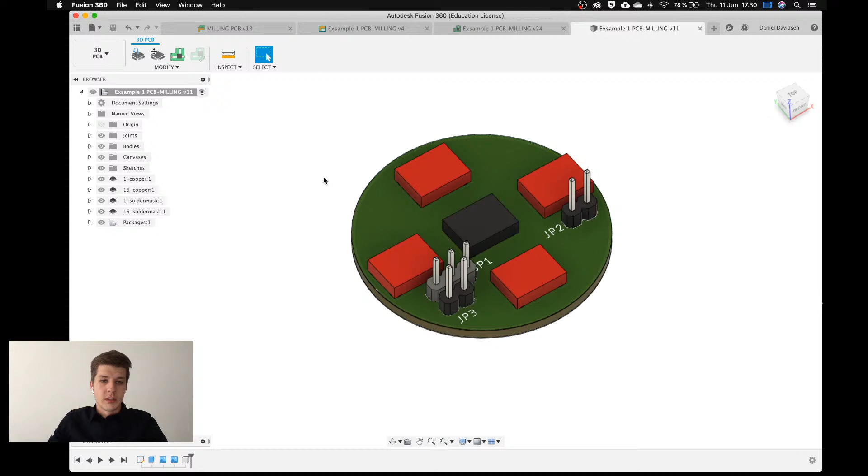So this is the small PCB that we're going to do today. It's one of my previous projects. It's a little old now, but I'll go over this and we'll figure out how to do a single-sided PCB like this one.

So just to tell you a little bit about what it is, it's basically just 5 switches. It has these resistors on it, like a voltage divider, and when you short one of the switches, it'll be a specific voltage level, and that can be sensed by this AT-tiny on the ADC converter. And then we have some pin headers for power.

We also have, so actually this is the power connector, and then we have power to a small, actually I don't remember what this connector is for. Oh yeah, no, it's for a NeoPixel ring that I used. So it has a data out here and power for it. And the last thing that we have down here is a small vibrating motor, so again a small pinout for that and a small little transistor down here for driving it.

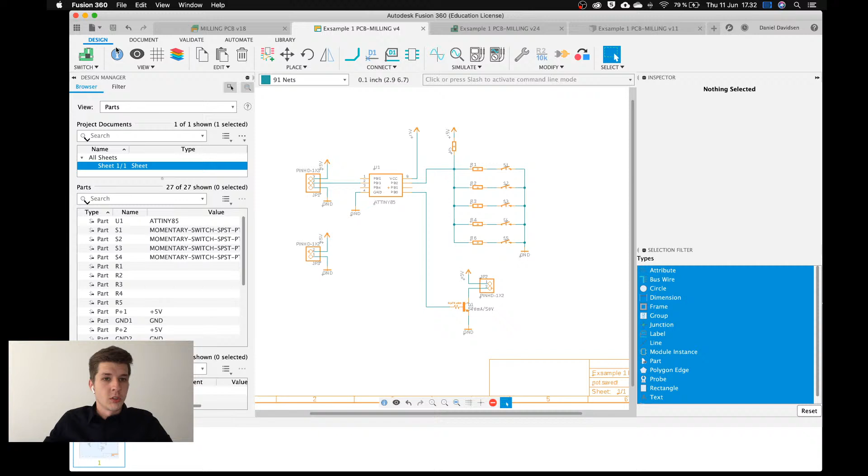So I just built this all in Fusion here, and then I switched to the PCB document and did all my traces and everything. I made sure that everything was on the bottom layer. You can do both top and bottom. If you want to do it on your CNC, you can just flip it if you want to, but it's a little bit more complicated and needs a little bit more alignment. But it's totally perfect to do in Fusion as well.

But you can only do like 2 sides otherwise. If you want to do 4-layer boards, you have to get them ordered from China. That's cheap, but if we want to prototype or make our prototypes a bit better quality, I think that PCB milling is the way to go. It's a really important way of working. So let's just jump right in.

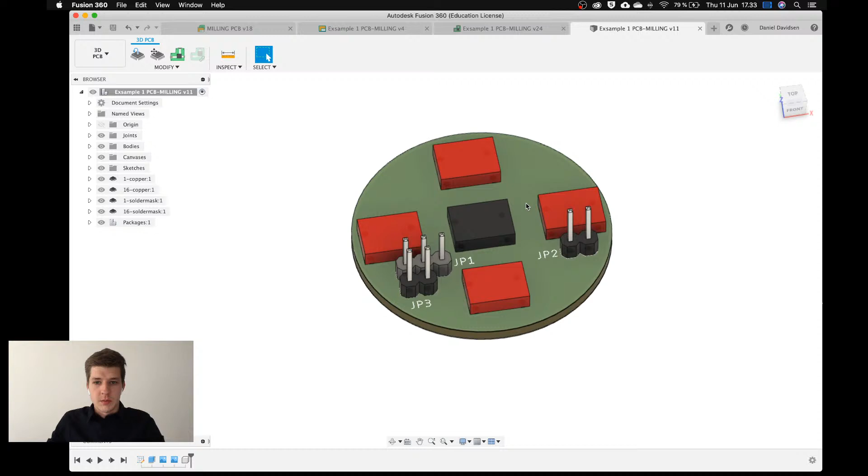So I exported it over, I can just show you how I do that. So I make sure to export over to a 3D design PCB. If I click on this button here, then it'll jump over to the design. So here it is. The switches are not really in a 3D package yet, so Fusion just models them like this.

I can just see a little bit on my screen that it might blink out sometimes. I don't know if you guys see the same thing. Please let me know in the comments if I need to fix something like that. So I am on my computer alone today, but I do have the chat open next to me here, so if you see me looking over, that's the reason why I'm checking if something is happening.

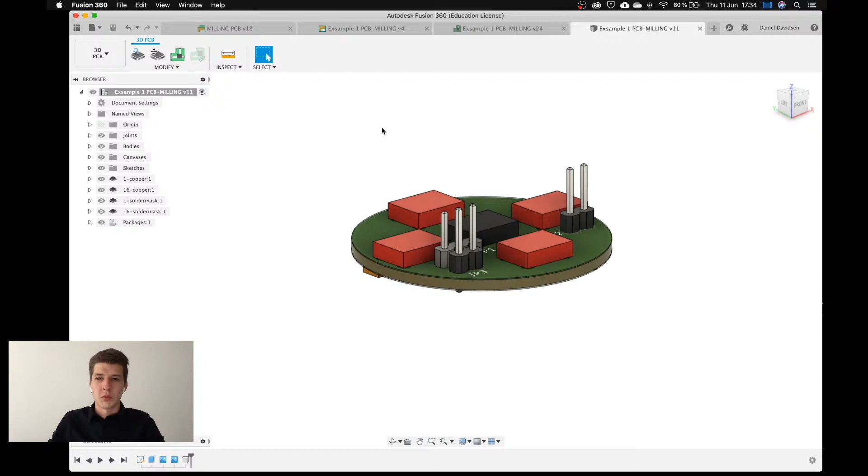So here on the bottom layer, we have all the tracks, and something really important when you want to PCB mill is the clearance between the ground plane and the traces. So the spacing in between the track and the ground plane has to match the width of the end mill that you're using. We usually use these kind of pointy engraving bits, and they have a flat area of about 0.2 or 0.1 millimeter flat. That's really good for these kind of SMD components if you want to get in there and make sure it cuts out these thermal pad connections for grounding.

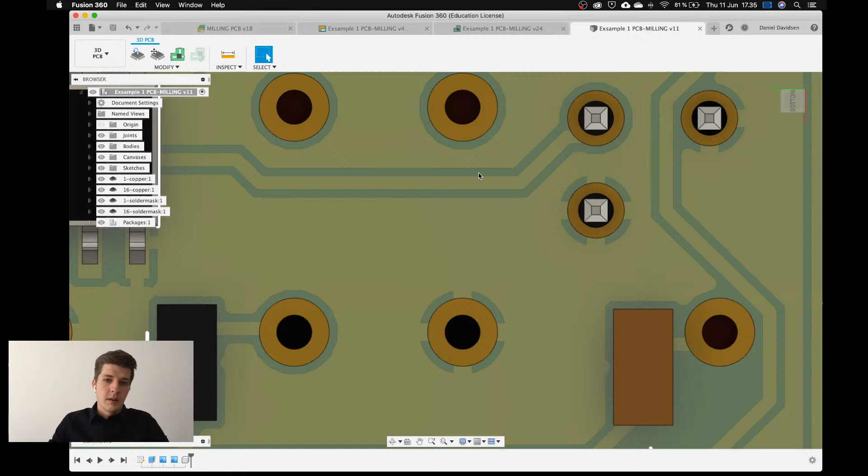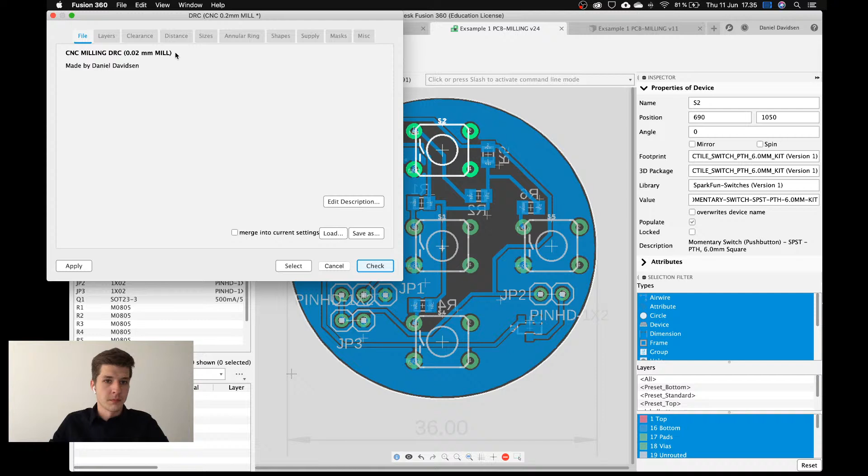The clearance actually comes from the 2D workspace, so if we want to change that, we have to change it in DRC. It's a little bit of going back and forward in your design between 3D and 2D. So the place you'd make sure something like this fits is under Rules, DRC, click on DRC.

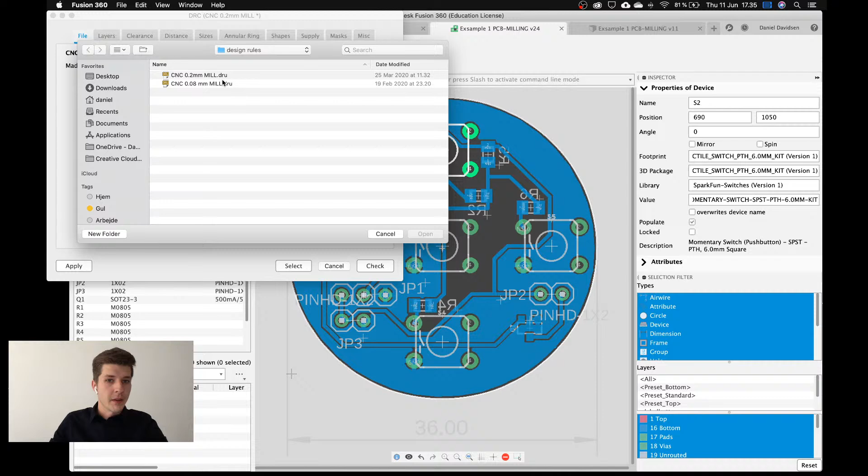I've put my clearances in here, and sometimes they come in mils. I don't have a default rule check, but under clearance it usually comes in mils, though you can switch between mil and millimeters and it will just convert it. So I'm going to use 0.21 millimeters to give a little bit of space, since I'm using an engraving bit with a 0.2 millimeter flat on the end.

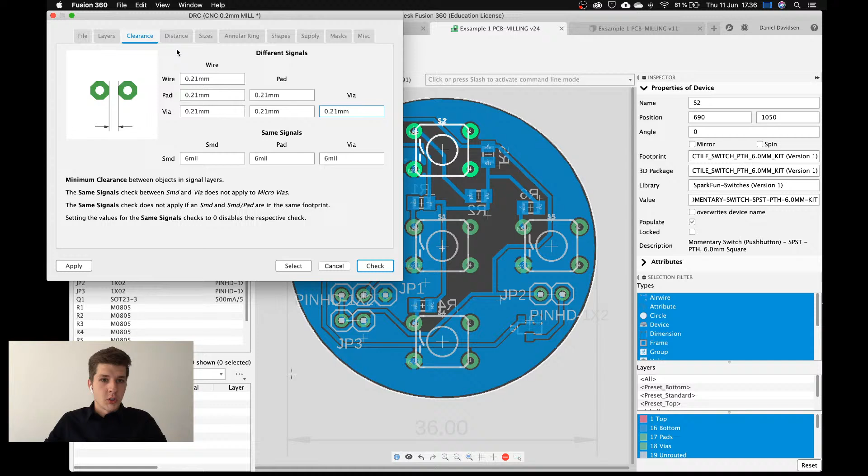So just type all that into these fields here. The drawing on the left side is quite self-explanatory, so just make sure those are selected. I do the same thing for the edge of the board and the traces, and under supply, if you want thermal isolation, you should type it in here as well.

Since we're in the DRC, I'm going to go over the layers as well. The layers define how thick the copper layer on the top and bottom is, and the whole thickness of the board.

I'm going to change this because I already cut this on a CNC and figured out I need to go a little bit deeper for the copper layers. So I'm changing this to 0.2, and my total board thickness is usually 1.6, so I'm subtracting here to get the correct thickness. That also sets how deep your engraving bit is going to go.

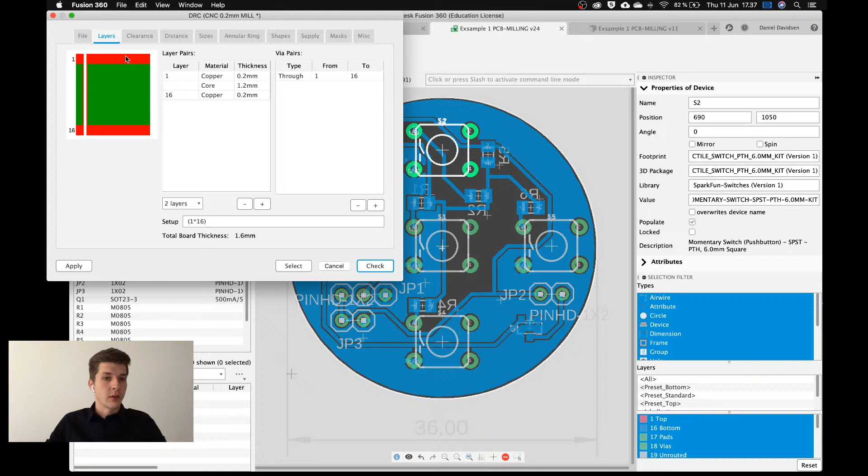So when all that is done, I'm going to apply and select, and that changed all of that. Now I'm just going to push that over to 3D design as well. You can see in the bottom right it has to recompute the whole model, so it takes a second.

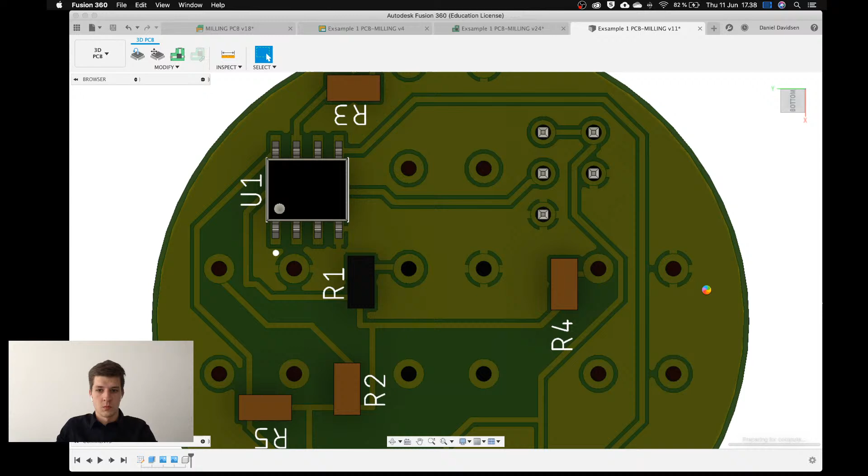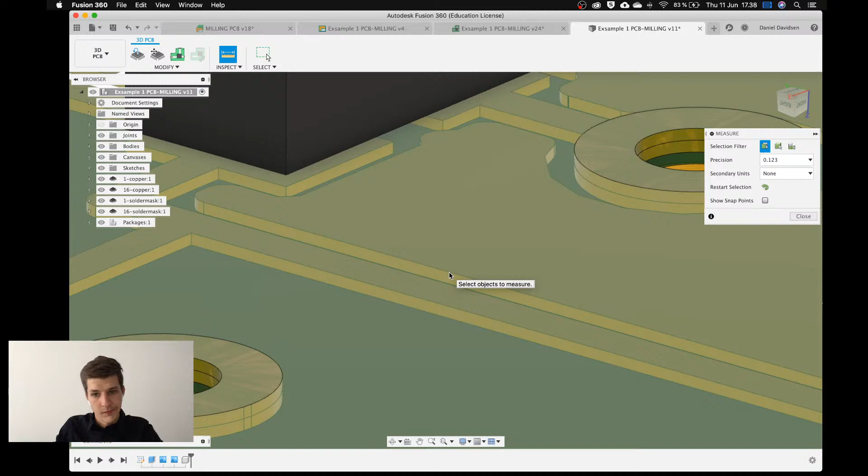Now that I have everything done, I can check that my clearances are correct. If I zoom in and press I for inspect, or measure, I can click on one of these lines. A quick tip, if you hover and hold, you get the selection bar so you can select better. You see it is indeed 0.21 millimeters, just like we wanted.

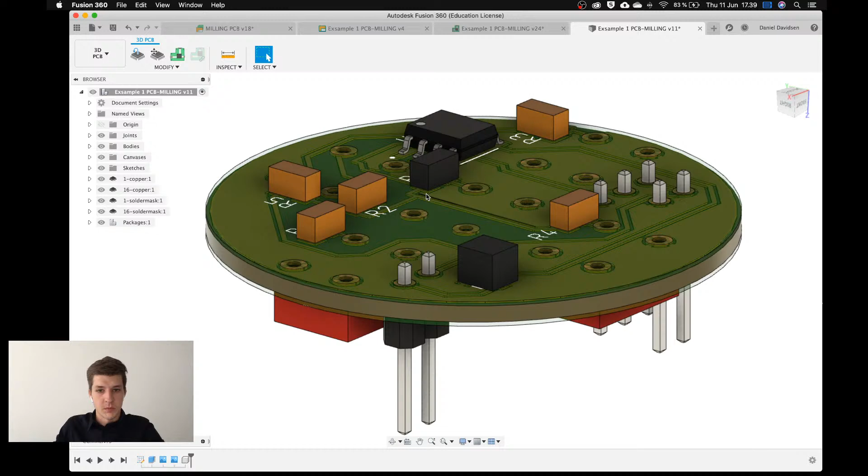Okay, let's get ready for milling then. The first thing I want to do is clean it up—I don't want all of these parts showing on my design when I'm looking at it. So I'm going to turn off the packages, which turns off all the components. Then I have layer number one, the top copper layer down here, which I can turn off since I'm not doing this as a two-sided design.

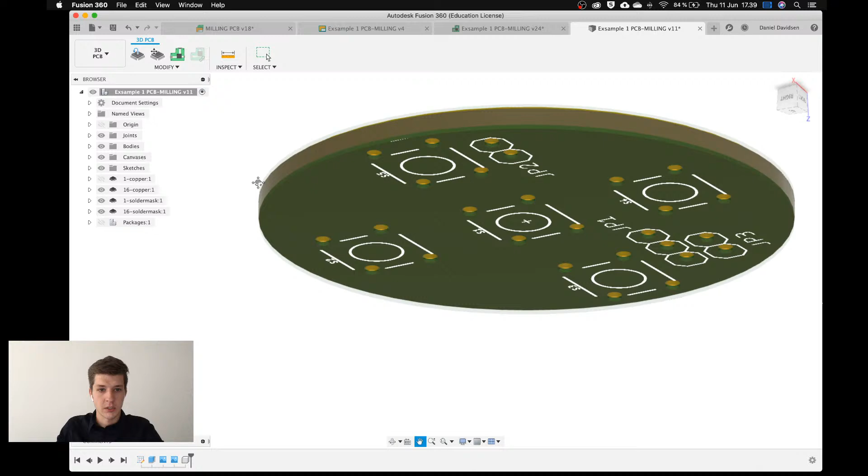The next thing I want to turn off can also be layer one here. Layer 16 is the bottom one, and the solder mask—turn that off as well. So you see now that it actually shows the bodies.

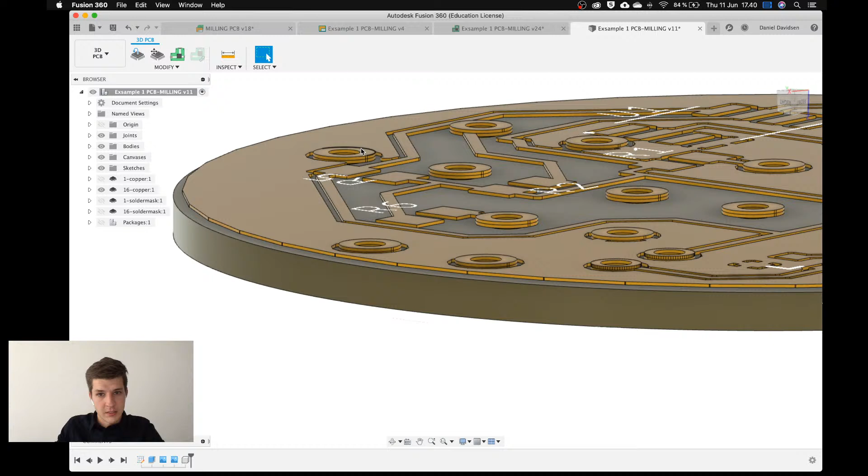Down here I have the board, and then I have my track with the copper layer, and all the way on top here I also have a silk screen, I think it is. So if I click on one of them and press V, it hides it—so it's inside of this component right here, and one of the bodies is now hidden.

So I want it to look like this: one single height with the copper layers that I need to cut out. Then I'm going to use the drop down over here and go into manufacture.

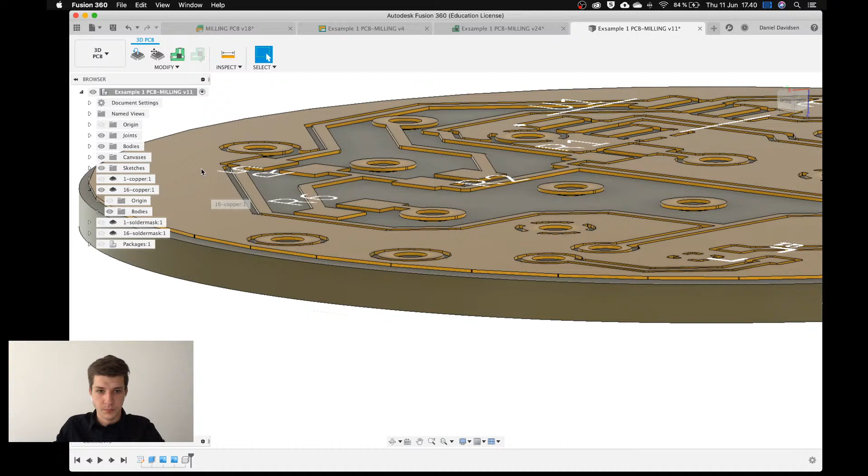So my setup here is already done because I did it once. I'm going to show you how to do it, but let's first have a look at what we're going to end up with. I get these warnings for out of date because I updated the DRC, so I can just hit setup and do Command G for regenerate.

And that's going to regenerate all the tool passes here. It is a 3D toolpath, so it's going to look at the model and calculate the correct route. That also means it takes a bit more computing power to load, so this might take a while, like a minute or so, especially when my computer is under heavy load from streaming this live.

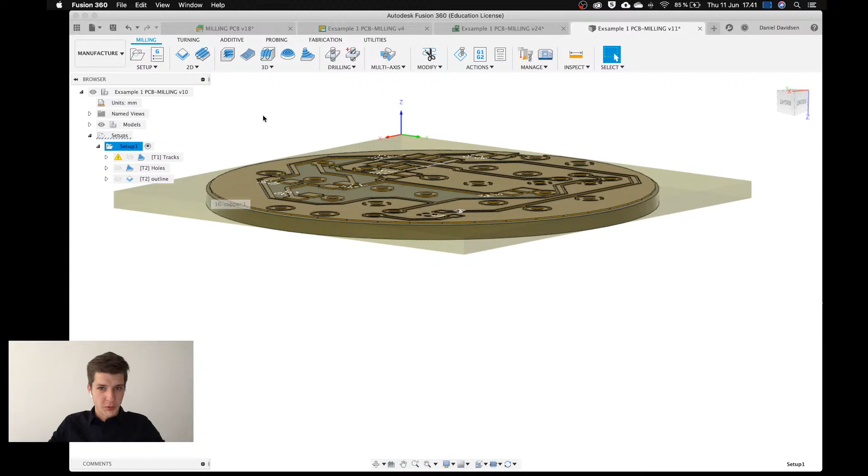There we go. So if I just do a quick simulation of this so we can see what's going on, I click on simulate up here. I'm going to turn on stock and turn off the model. This basically represents the copper sheet that you're going to put inside your machine. And I'm also not going to show the holder just because that's quite big.

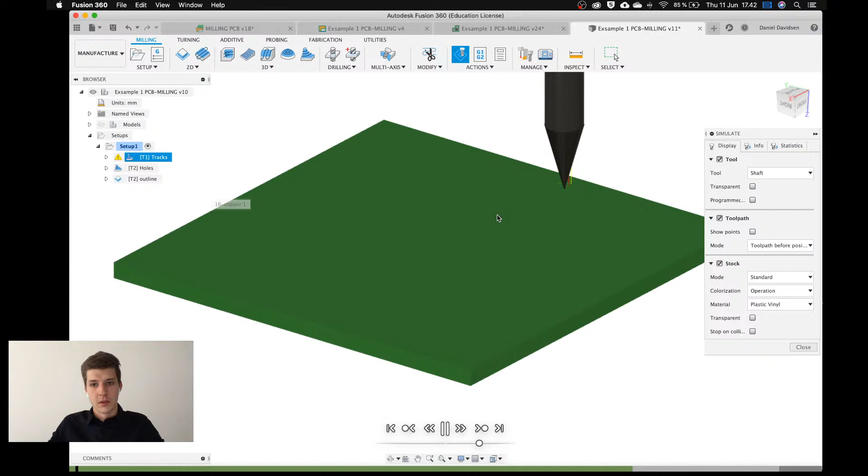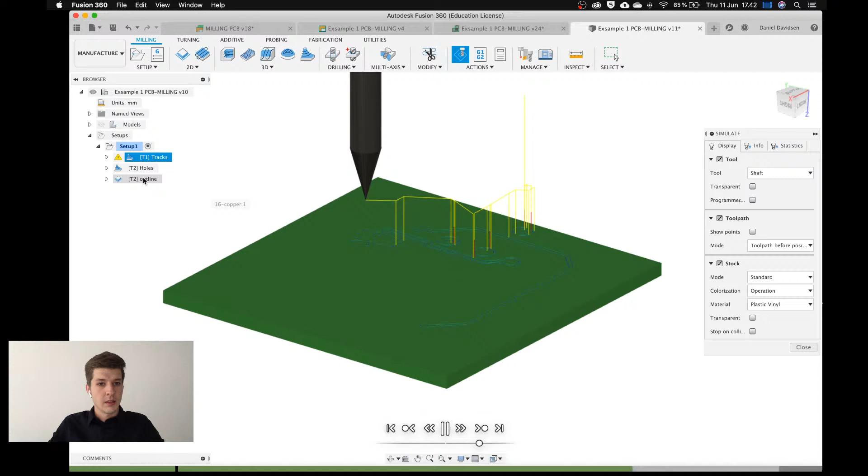So it will start out doing all the traces on just the top layer with the engraving bit. When it's done with that, we have to change the tool to a flat end mill, and I'm going to use a 0.8 millimeter end mill for the job. That's what it's going to do next. The next operation is going to be drilling out all the holes, and the last operation is going to cut out the outline of the board so I actually have a board.

So I can speed this up so it goes a little quicker. You can see that it goes through and does the whole job.

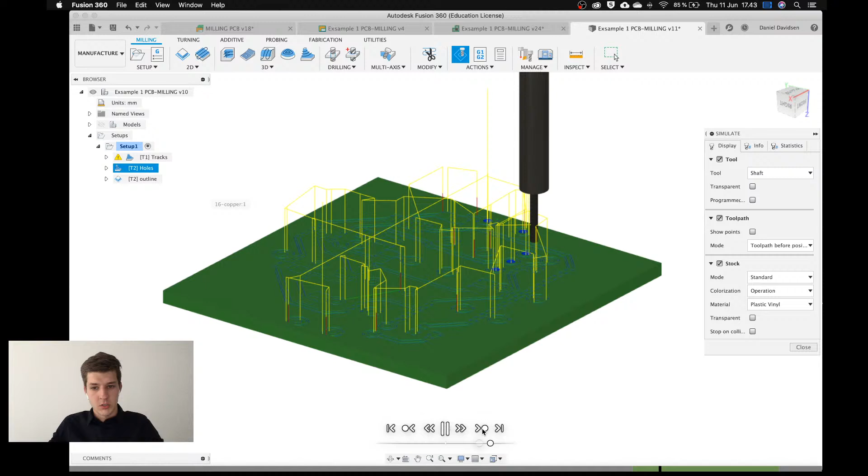And right here, you can see that it's going to change operation into the end mill. It's going to go in and cut out all the holes. I'm just going to skip ahead so it goes a little quicker. And the last thing you'll see it do is walk around the perimeter and do this in a single cut.

Okay, so how did I do it? Let's do a new setup. Turn on the model, new setup, click on this button right here.

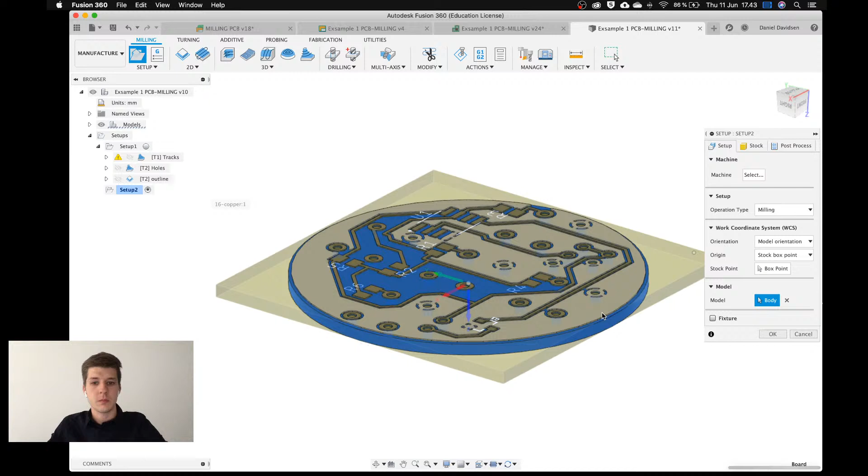Okay, first thing is to select your model. Under model here, if it's already pre-selected something, make sure to hit the cross and make sure that it doesn't have anything selected, because otherwise it might have packages included in the models and we don't want that. So we're going to hit on the bottom layer here, and then I'm going to grab all the masks, and it should be like 3 clicks or so, just so I have everything selected now.

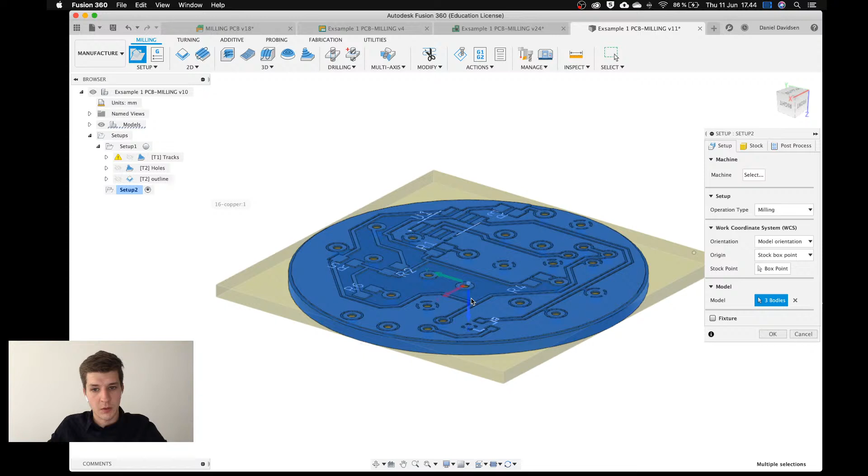Next thing is to orientate the coordinate system to the correct point and set the starting position. So first of all, I'm going to orientate it so it's right. I have Z downwards right now. I can simply flip that by hitting the small arrow here. If I click on that, I'll flip it. And this orientation is actually already correct.

But let's say it's not, just so I show you how to do it correctly all the time. Let's say that Z was pointing in the wrong direction, so it's like here, Z is in the wrong direction. So I have to make sure that that's corrected.

So under orientation, it pre-selects model orientation. You can choose another one, like Z and X axes - that's what I'm going to choose. I'm going to choose the Z axis. Here I can choose either an edge that is parallel to the z-axis, or a face that is normal to it. I'm just going to choose the top face here.

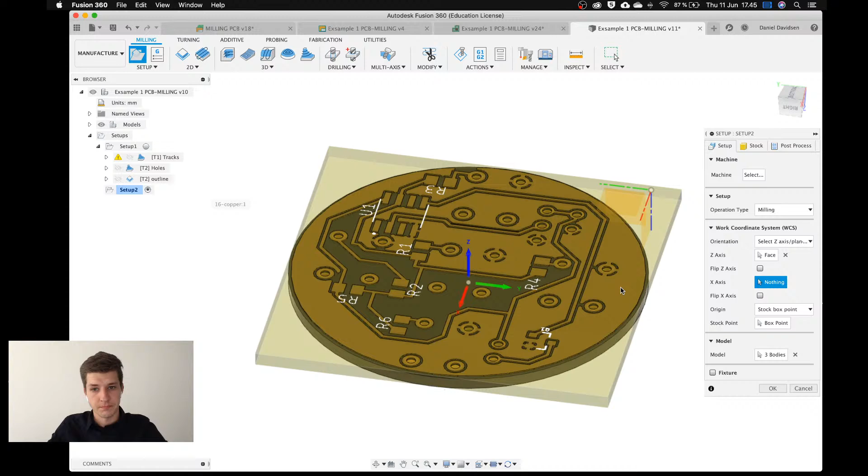So you see now I flipped it down. I can do flip z-axis - that's the same thing as hitting the arrow. And then I want to make sure that my x-axis doesn't really matter, it's round, so I can just choose maybe to be parallel to this axis. And you can see that it switched.

And then I want my starting position to be here on top, so I can do stock point. It's going to give me points on the stock all the way around, so I can choose the middle or somewhere else, but I'm going to choose this corner up here.

It's rather important that you choose the top point if that's what you're going to do. Often we go in and touch off on the surface, so make sure that you set your C0, your coordinate system 0 point there.

Next thing is stock. I am going to choose relative sized stock, so the relative size box, and then I'm going to choose the offset mode to be no additional stock. It tells me the height is 1.4 millimeters, and that's the size I need for the job. It's 1.4 because we deselected the copper on the bottom. I said PCBs are 1.6, but we also put copper on the bottom, being the last 0.2 millimeters, so this is fine. We're going to go through with like 0.5 mil anyway, so I'm just going to hit OK, and that's the setup done.

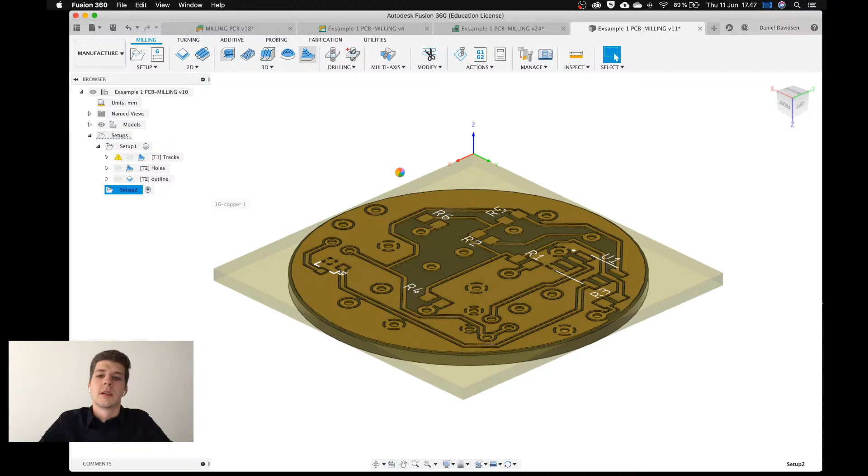We'll just give it some loading time.

Here we go. First thing should be to select the tool, so under tools here, we should select the tool. I already did this, so I have the tools built in, I have them right here. But I'm just going to show you how to do a tool like this.

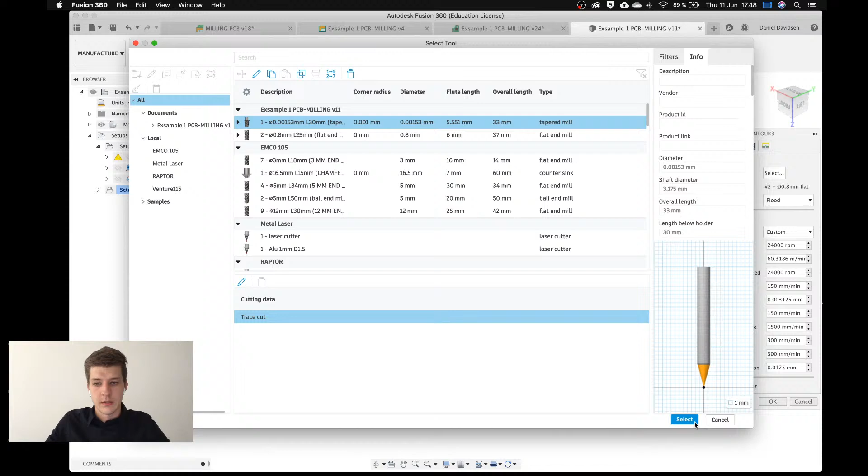So what can I do? Now I can't create a tool before, inside the selection, so I'm going to choose my tool first of all, and click select. I'll show you how to create the tools after I've done the contours, after I've done this toolpath here.

In case you want to know, these are my parameters. Maybe this should also be 24,000 RPM. The cut feed rate that I like to use, this one here, is probably the one people are looking for - 150 millimeters a minute is what I'm using. I've also seen that Fusion right now has some problems with really small millimeter values. I'm not going to deal with that, I think it's some kind of bug in Fusion, so that's just how it is for now.

Next thing is contours - geometry, and then I can do selection, and select the outside of the board. That tells Fusion you can work on anything that is inside this green profile. Then I don't want it to cut out this small part right here, so I'm just going to do an additional offset for the sides, and I'm going to choose that to be -0.5, I think that's going to be okay. We can always check and go back to see if it creates any problems.

Then I'm just going to go over heights. I don't think I have to change anything here. Step down is also fine, 1 millimeter. Linking - here I want to change this to be plunge, and I don't want it to have lead ins and lead outs. I'm just going to leave it like those.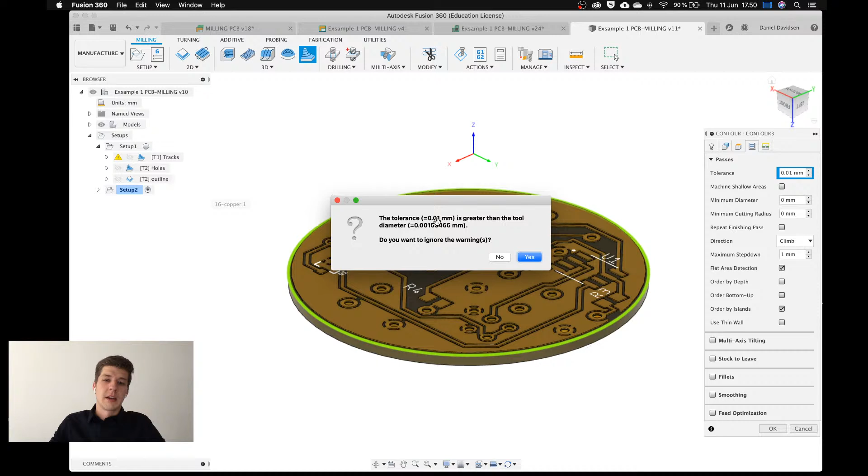So let's hit OK. It just tells me that the tolerance is greater than my tool diameter that I told it to be - we're going to hit OK for now. This was not a problem a few months ago when I did this, but when I try to do a 0.2 millimeter tool now, Fusion rounds it down to almost 0. I hope they'll fix that soon.

So, calculating the toolpath. I know it's going to make one mistake here, and I can tell you a bit about it while we're loading the toolpath - it's because of the holes. It's going to try with the tool to drill out the holes. We don't want it to do that, we don't need it to drill out every single one of these holes as deep as it can go. We're going to come in with another tool later on, and that's going to drill it out. But just for showing what it actually is going to do, we should just do it like this.

Okay, I think I've gotten there. So just open the setup. I usually don't find my computer slow, but if you're doing a live stream, that's heavier than you think.

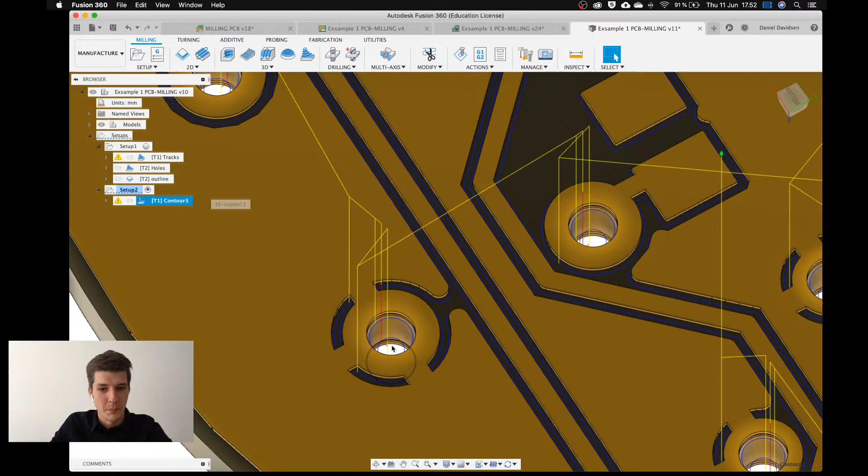I found out. So you see here, the blue part is the bottom of the toolpath. It's trying to drill out this hole here. We don't want it to do that. So my fix for it

is that you can just set the height to be different. So I'm just going to edit the toolpath, and we're going to set the bottom height to be equal to like the lower layer in here. So... any minute now.

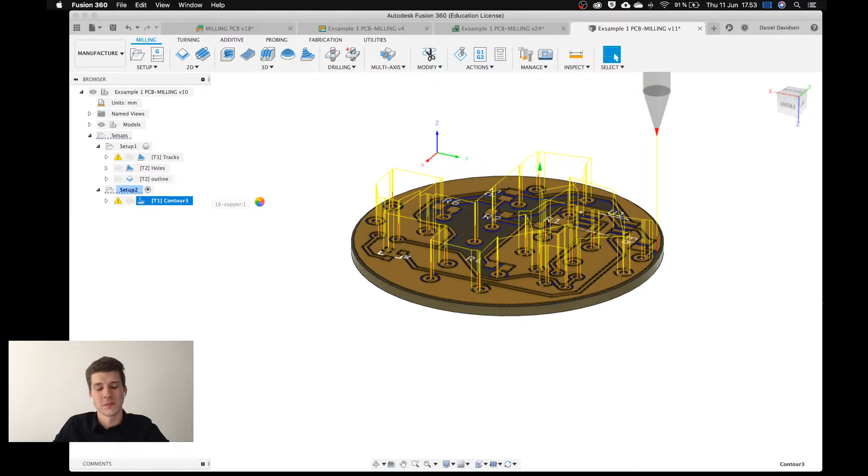There we go. So under height, I can do bottom height, and then I can do selection. And I can choose this face right here. So even if I go back into the PCB working space here, it's going to obey that this is the lower part that you can go.

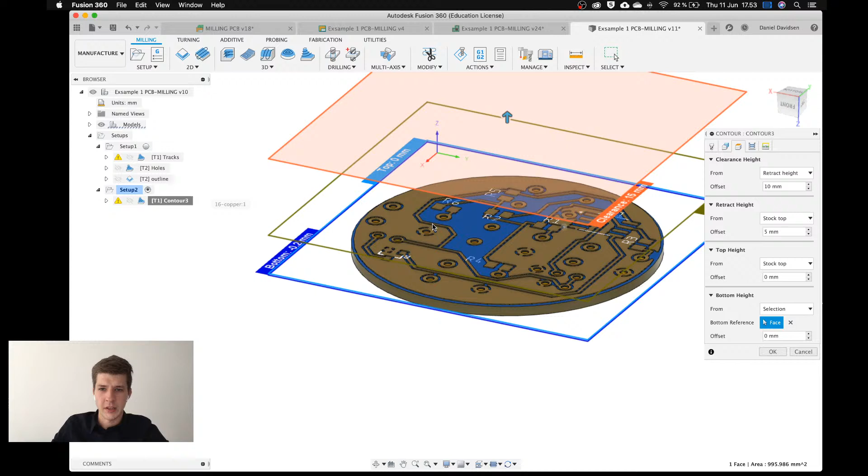You also have the opportunity to do an additional offset if you figure out that you have to go deeper. It's a matter of preference if you want to change it in DRC, push it over and then fix it. And then you fixed it for good, or you can do the cheat hacky way and just do offset.

So if I do OK now, it's still going to give me the same warning. That's fine. So now it is still going to engrave the center of all of this. It's maybe not the best strategy to do, but I think it's so quick for the machine to do that, that I'm not gonna bother with fixing it.

Otherwise, you have to select all the holes, and when you select like the green circle here, you can select all the holes, and that will tell Fusion to stay out of those areas. So if you have an enclosed area inside another enclosed area, it assumes that's a no-go zone, and it will not try to do anything in that area. But I wouldn't do something like that.

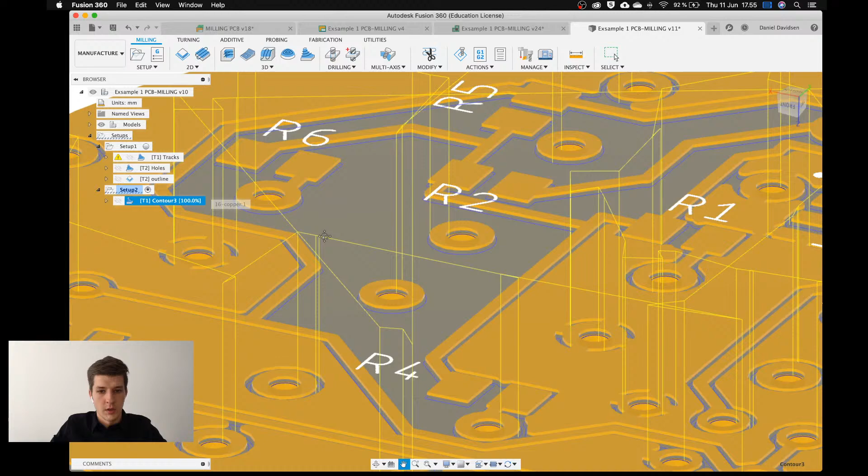I'll just let the machine run a little bit longer. Okay, so finished calculating. There we go. And if we look inside one of the holes, you see that it doesn't have the cutout anymore.

Okay, so quickly, the tool — if I want to create a new tool, I can click on the tool library up here. That will allow me to create a new tool. So I'm just going to load, and here we go.

So select the library, it says. Let's just choose this document and then click add new tool. So here you can choose either between a tapered mill, that's what I'm going to do, or some people like to do that or a chamfer mill. Chamfer mills are not that great for it because I think contours are not allowed with chamfer mills.

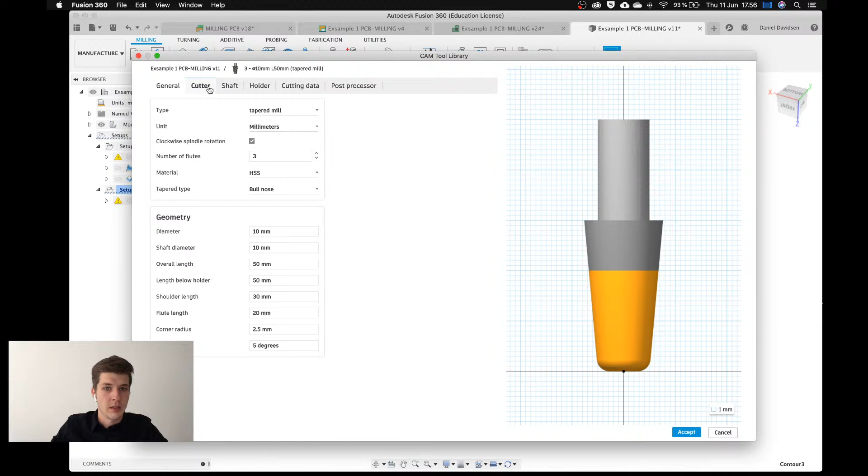So just choose tapered mills, and then you can go under the cutter. So we're gonna have a single flute, and it's going to be a bull nose, and the diameter of the bull nose down there is going to be 0.1 or 0.2 millimeters. Shaft diameter is usually around 3.

Overall length, I'm not going to touch it. Doesn't really matter for me. You have to be specific for your tool. 50 — I know it's a bit long, but I'm going to leave it. You get the hang of it.

And the last part here is maybe corner radiuses down here. I choose those to be — you should choose them to be 0. But Fusion has a problem, so I'm just going to do it point by point, like that. So I think maybe a little.

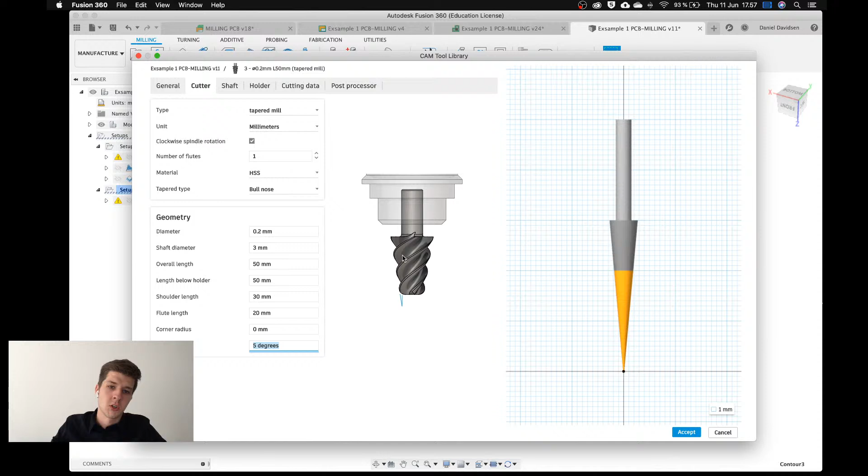I did it. And the taper angle, the one that we are usually using is 30 degrees. But just be aware with the angle here that it is measured from vertical, so it is going to be 15 degrees instead.

And I think how I fixed that it doesn't have this huge hangout like this for my tool is I did the math. You know the angle, you know how thick the tool should be in the end, figure out how long that should be. Let's just try doing something else like 10. See.

Why didn't it do that? Shoulder length must be larger than flute length. Okay, flute length, there we go. 10, 8.

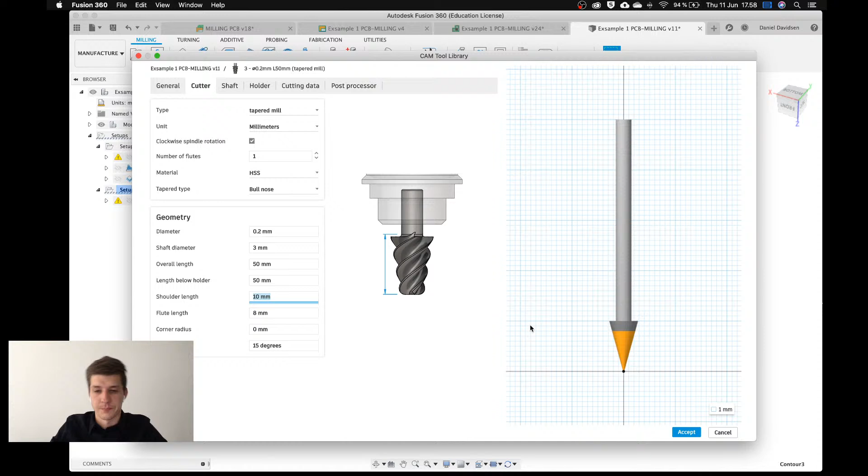So you see where I'm going with this. I highly recommend doing cutting data, so I did a cutting data here where I chose it to be like trace cut, and typed in the parameters from before. If you want to know them, scroll back in the video and you'll find it.

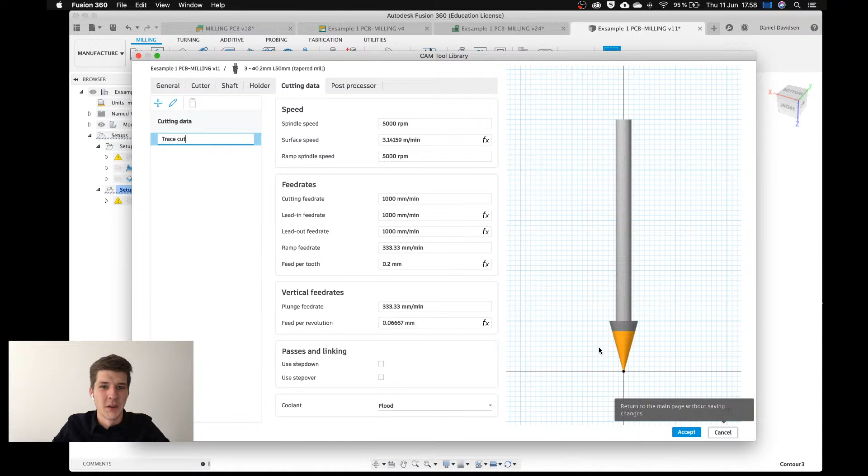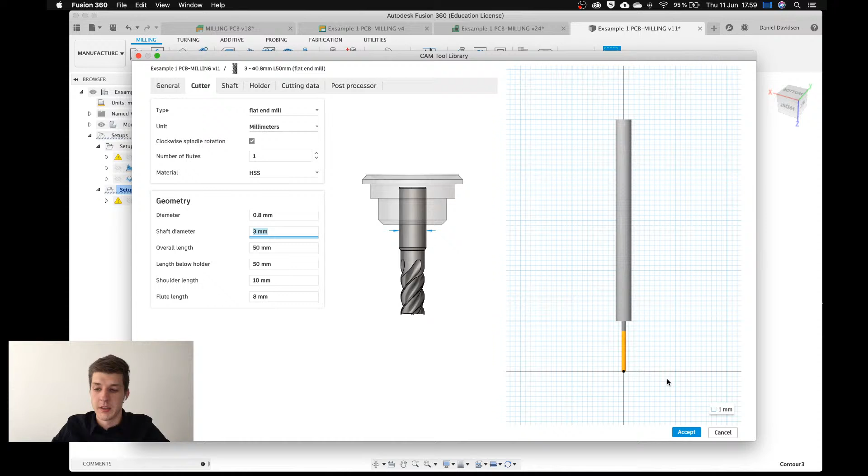And if we want to change the cutter, you can change it here. Instead of tapered, you can choose a flat end mill and go through the parameters again. Same deal for our 0.8 millimeter end mill instead for cutting out. So that's the one we're going to use now.

Okay, so that's next: holes. When we want to do the holes, I am going to do contours again.

This video is going to be mostly you looking at me waiting for something to load.

So first thing is the tool that I should change. I'm just going to choose the 0.8 millimeter tool that I have. Here we go.

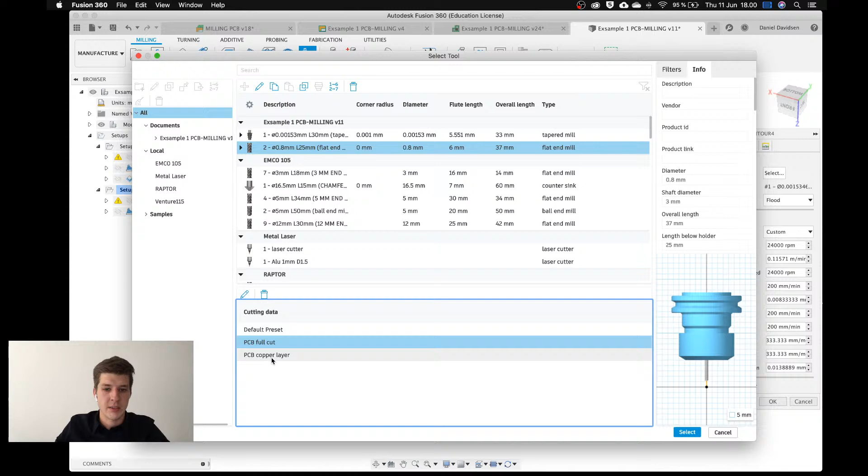Under my cutting data, I made sure I had a PCB full cut. That's the feeds and speeds for a full depth of cut with these end mills. But if you do your whole job with a 0.8 millimeter, you can run a lot faster on the copper layer, so having a faster feed rate for that is my recommendation. I'm just going to choose select.

If you're wondering what the feed rates are, here they are. Now that I see this is 200 millimeters a minute, I think you can go a lot quicker with the engraving bit, but that's on your own shoulders to do so.

Geometry, I can just click on the edge. It's going to pre-select it to be selection. It knows that's what I mean.

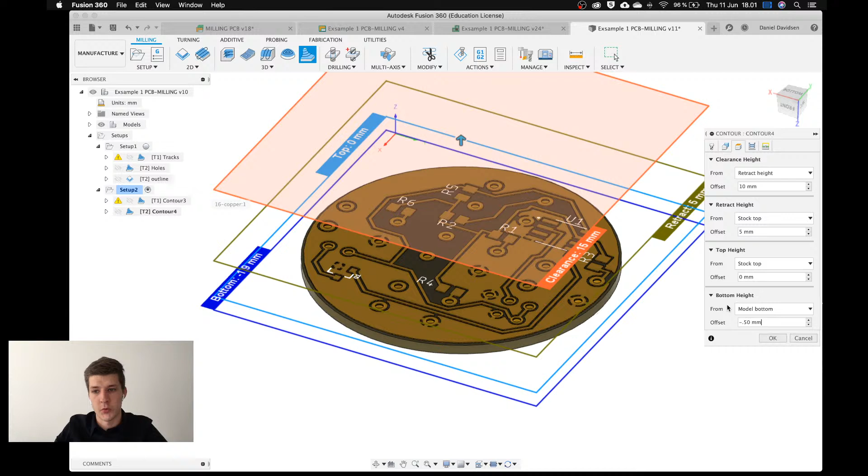Heights, bottom height: I want this to be negative 0.5 millimeters, just to make sure I drill all the way through the bottom. We usually have wood underneath this, no big deal cutting through that. So that's what I'm going to do.

And then the maximum step down. This is already a 1.4 millimeter board, or 1.6 in real life actually, and then we just added an additional 0.5 millimeters. So if I want to be exact about it, I could do 1.4 plus 0.5, and that should make sure I can go through and do this in one cut.

Linking: again, I'm going to turn off helix into a plunge, and I'm going to turn off my lead-ins and lead-outs. You will quite likely get errors if you have lead-ins and lead-outs turned on, because it's such a tiny hole where it has to go in and do a job. So just choose OK, and let's see what kind of toolpath that gives us.

As in our previous live stream, we should think about getting elevator music.

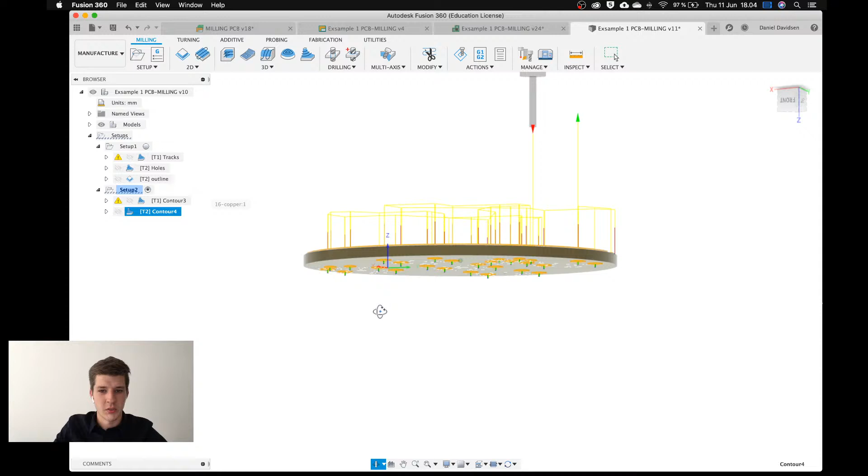So it is going to go through the holes. If I go under the bottom here, we can see that. So there's also another mistake here. You see how it helixes in and does this kind of spiral - that's the step down set to a wrong value. And it also has the problem right now of trying to cut out these things we already did with the engraving bit. So, edit, and we're going to fix that.

Fixing this is going to be almost the same procedure as we did with the bottom height for the engraving bit. We're just going to choose that it can only start doing work at the same face, being this one, so it doesn't look at the geometry that the tracks actually are at. We're just going to ignore those when we get the option to actually do it. Here we go. So top height, do selection. Selection to this reference, this plane right here.

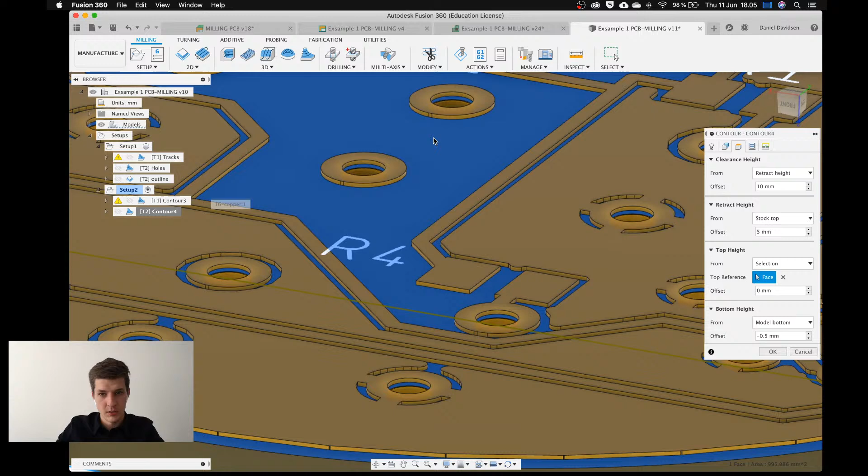And just going to set this to like 2. We'll see if that doesn't fix it. Otherwise, try like 8 or 5 or something. Then that should do it.

Sometimes if you're right on the border, it'll do a step down, where it'll go in and spiral instead, like that for clearing out chips. But we've done this 100 times before at FabLab, and you can do this in one operation, so no need to do step downs here. At least that's our experience.

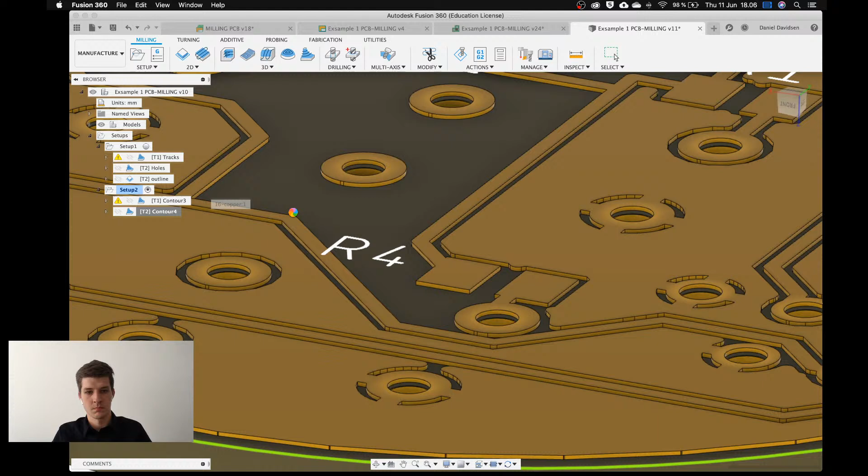Here we go. So you see a lot faster compute time for figuring out the contours there. But obviously not quite finished yet. We're thinking.

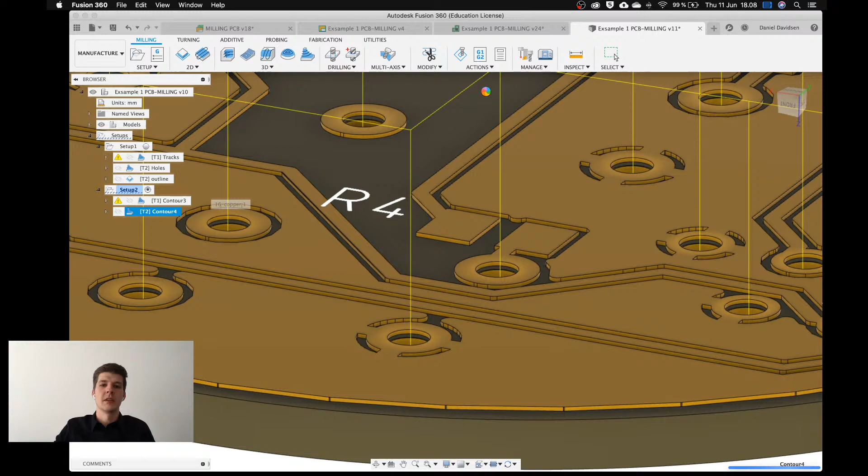Interesting. Finish the toolpath, but the computer is still loading. Might crash, does that sometimes, like the new electrical environment that they placed inside of Fusion has caused a little bit of hiccups. I usually find that it sometimes might crash going from PCB design into 3D design or do bigger computes like this. But I think really, even though there are some hiccups, it's totally worth it. Some of the new packaging and everything they've done with the design is super cool.

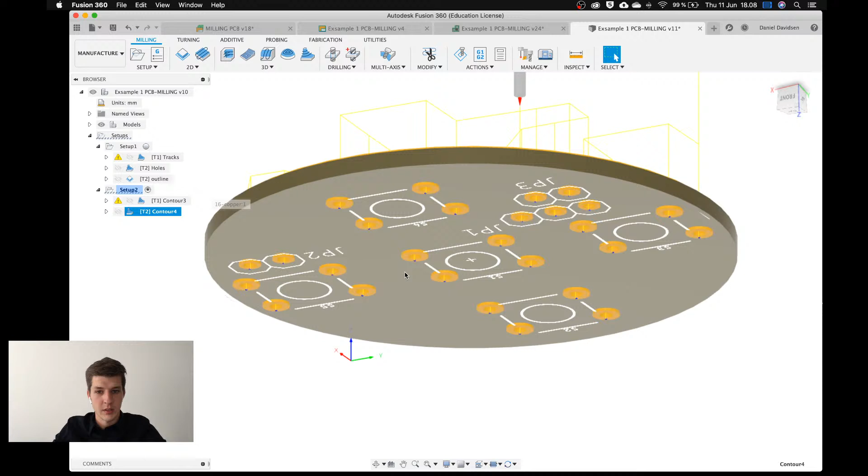So here we are. Here it calculated the way that it's going to go over and do all the holes. And if I zoom in on the bottom, what we should see is one blue line going around doing a small contour, just because the tool is smaller than the actual hole that it's going to go over and drill out. So this is quite neat.

Last step is to do the board outline, and I'm going to use 2D contours for doing this, just because I find it easiest, and it's what we call a dumb toolpath. So it's going - you have to select exactly where it should go. Before, we'd select something where it should look inside and figure out how to cut it. But with 2D geometry, I can tell it to cut anywhere, and it will just go straight through my board if I tell it to. So that's one thing to be aware of in 2D.

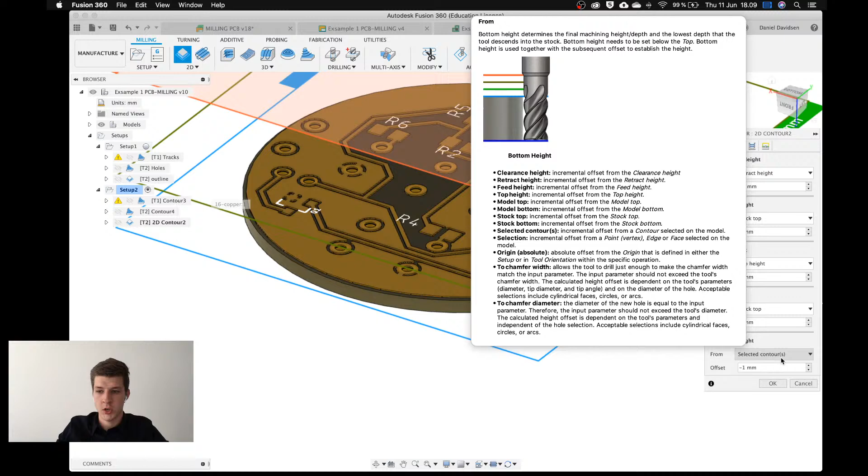So it pre-selects the previous tool used. That's also what I want - I don't want to change tools, so that's perfect. And I'm going to go under geometry. Here it's important that I select the bottom contour. The reason why it's important, you can also see that it's now a blue color, is when I go under heights, the bottom height is selected to selected contours. So if I selected the top, it wouldn't go all the way through the board.

And I've set my default to go negative 1 millimeters just because we do so much plywood work on this kind of CNC. I'm going to go with 0.5 instead. But most Fusion users will have this set to 0 as the default.

And then I'm going to make sure that multiple depths is turned on. It says 6 millimeters - it doesn't matter because our board is thinner than 6 millimeters, I'm going to turn it off. Most people don't have this turned on, it's tool library specific if it's turned on or not. I just programmed mine so that it is turned on - it's a good little safety feature.

I can have lead-ins if I want to. I don't like lead-ins actually, I don't find them very useful most of the time, so just turn them off. They do have their place - some places they are quite neat, but not for this kind of job. I don't think they're necessary.

So just do OK, and those usually load completely, like really fast, because it's just a line - you tell it to go on that line, it will go on that line. But the computer is a little slow here. This should be like a 25-minute work webinar if I had a faster computer.

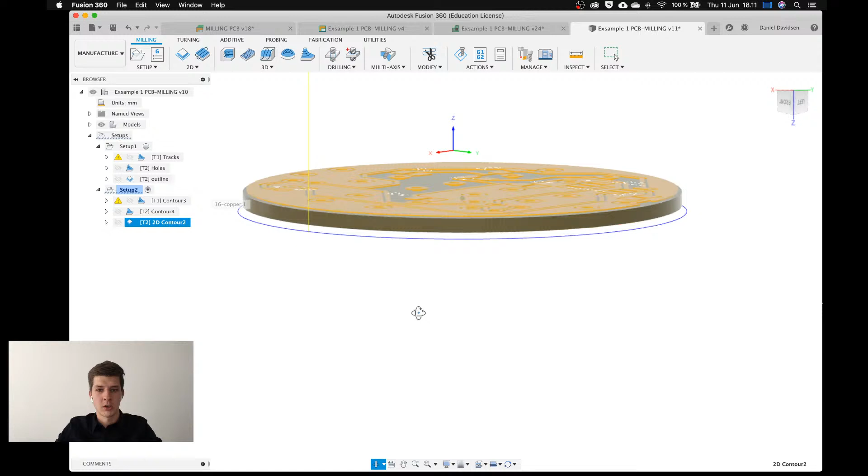There we go, just click on it. You can visualize and see that it's actually 0.5 millimeters below where I clicked. So now we are at the same level again, and we can go to simulate.

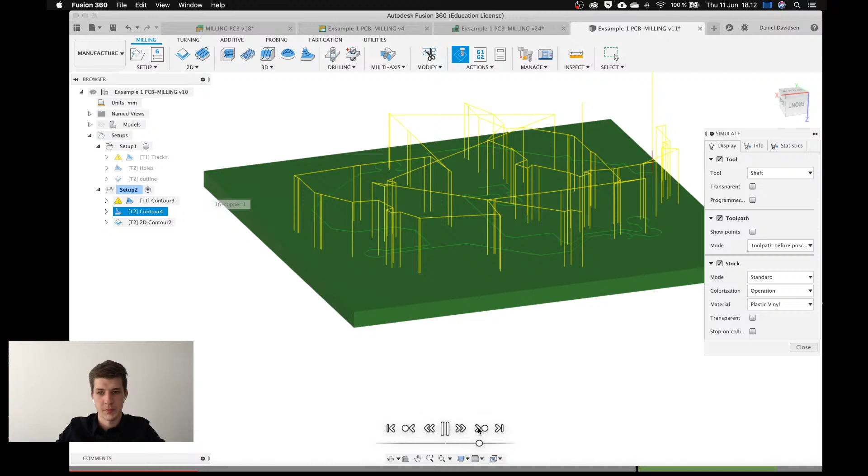You've already seen this, so just quickly, but it's a good representation of what's going on. Turning off model, and it's going to cut everything through here and do all the job. Okay, rather cool, I think.

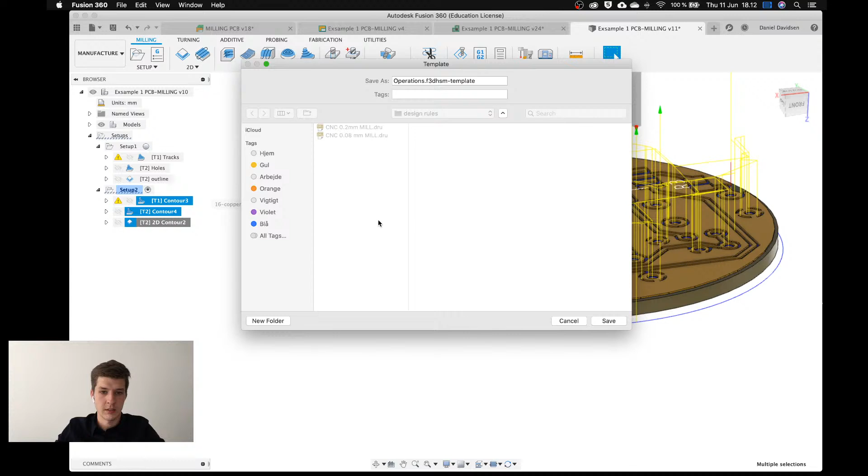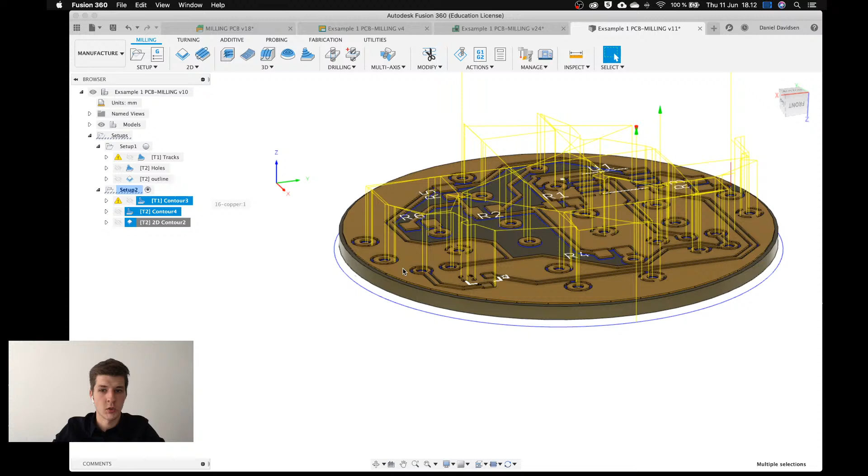So now that I've done this, maybe a cool little procedure would be to save this. Like 99% of all my PCBs are going to be programmed exactly like this, so I can save this as a template. I can click store on template, store as template, and select this to be maybe PCB milling engraver bit. It's going to be a little different, of course, if you were going to do this whole thing with a 0.8 millimeter tool, which we do a lot because it's just quicker not changing tools.

But now if I right click on setup, I have the option to create from template, and here I can just click this, and it will give me all the tool paths that I just did, and save all those negative 0.5s and offsets. But when I do this, I still have to go through them individually and select where it should work inside. Next time I do this, it could be a lot quicker just having the template to do most of the work for me.

So you see there, they came up with red arrows because there's no toolpath on them. So that's almost it. And of course, one of the things here that is really amazing in Fusion is now if I go in here and I found out that I need to change the model somehow.

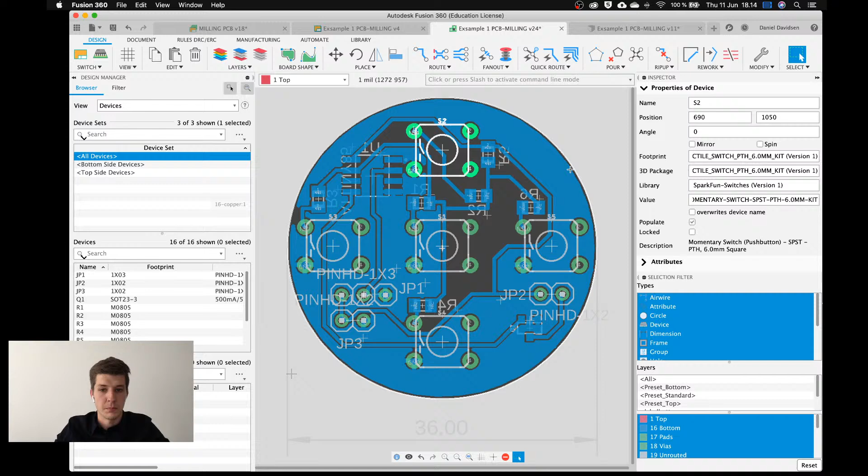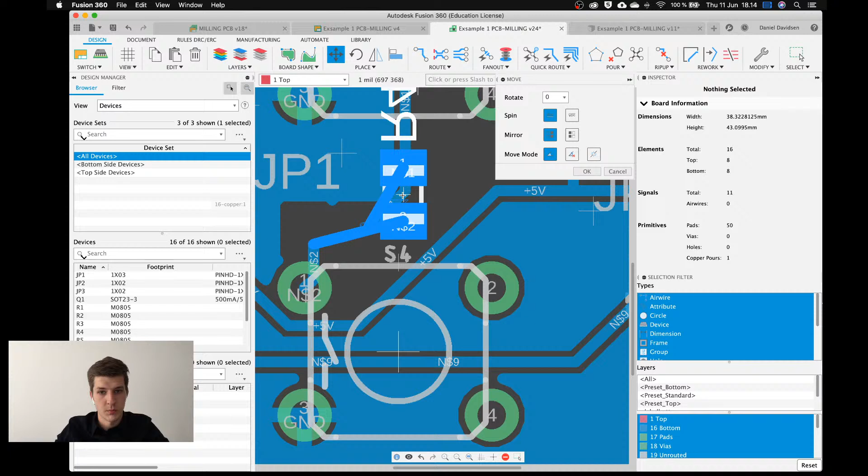So let's just do some minor changes to this. If I move this one out here, and I found out that this right in here is a little too close, I could just move it. See what else we can do. We can flip a resistor to be here instead. So a lot of arrows right now because I just had problems with the traces. So just do like this, and manual route.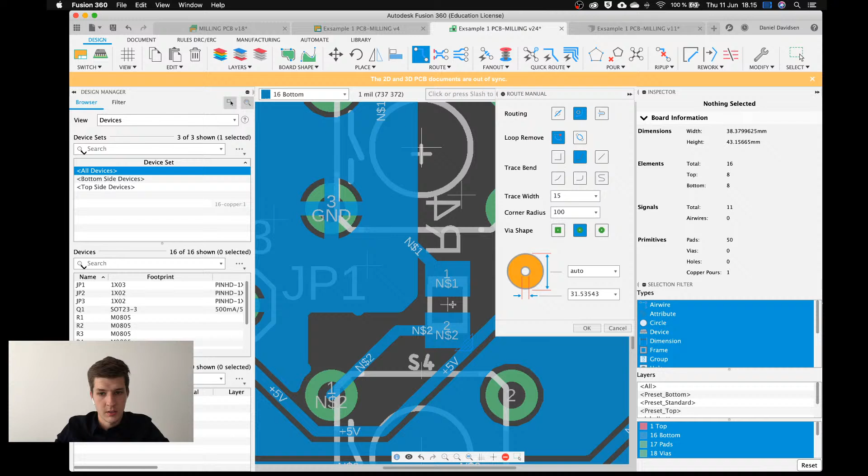Small mistake. Okay, then I should calculate my polygons, do ratsnest. Oops, that was not the button that I wanted to hit. This one for polygons, it's going to recalculate all of that.

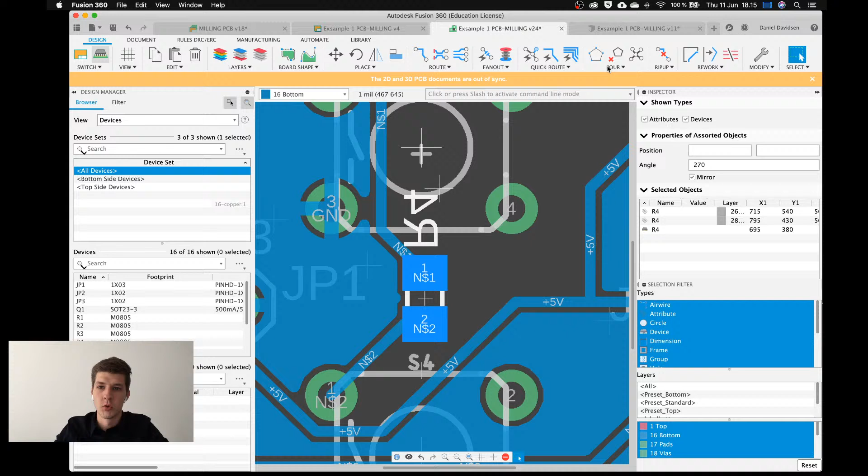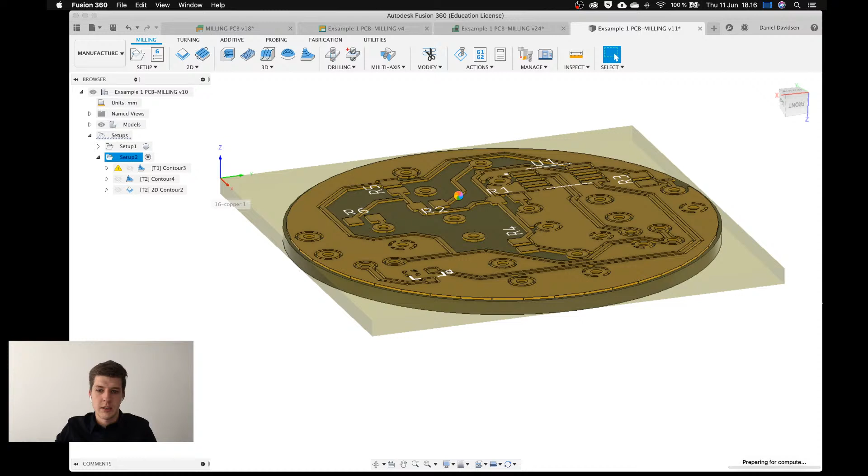Going to view it in 3D design. That's going to push it over, and there's no need for doing all your toolpaths again. Just like magic, we have to regenerate them, but it'll be a done job. No exporting to Gerber and importing and figuring out how all of that is done. This is going to recalculate here in the left corner.

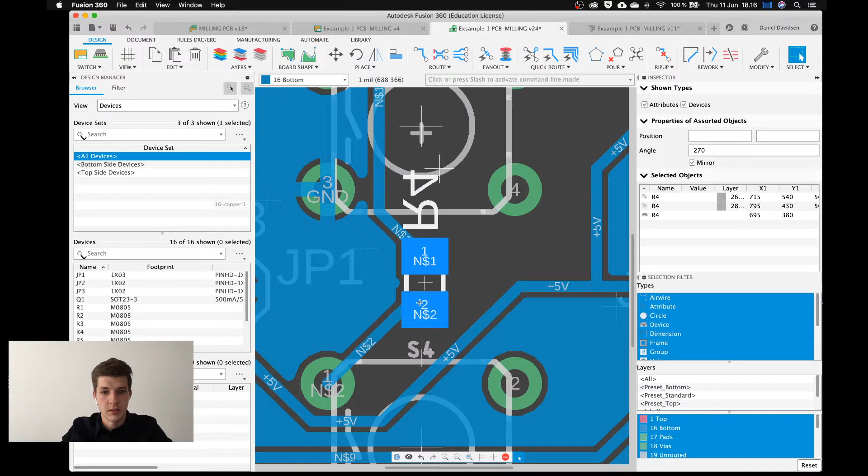Let's see if I did a change. I don't know where I did the change exactly. Where? Let's see, this resistor here is the one. That should be vertical. Let's just check if that's true.

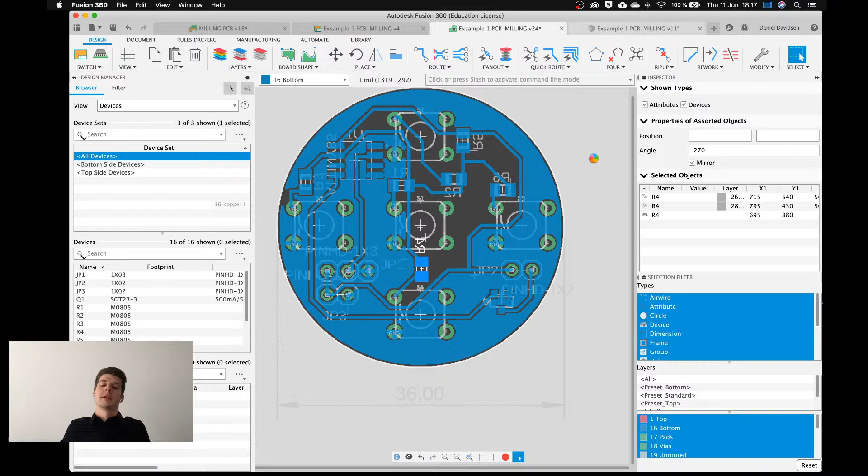Wow, the computer is, I think it knows it's dinner time, so it's like, I'm gonna slow it down. So see right here, there it is, the vertical resistor. And all the errors for the toolpath are outdated. Right click and generate, and then it should do that.

Job done. One thing that I might want to show you is how to make sure that your tool numbering is changed. So you see right here it says T1 and T2, so it knows that it's tool 1 and tool number 2.

I had this problem myself because the tool number is what is stored inside the library manager. You can have two tools, there is tool number 1, but if you go into your settings and export your G-code and just tell it to use tool number 1 twice, the Mark 3 mill won't stop. It thinks that I still have tool number 1 inside my collet, so it's just going to keep on working, and then it's going to plunge right through everything and try to do that job. You just have to make sure that the tool numbering is correct. You can use more tools than this, it will automatically do the calculation for you, but I'll show you how it's done when this finishes loading.

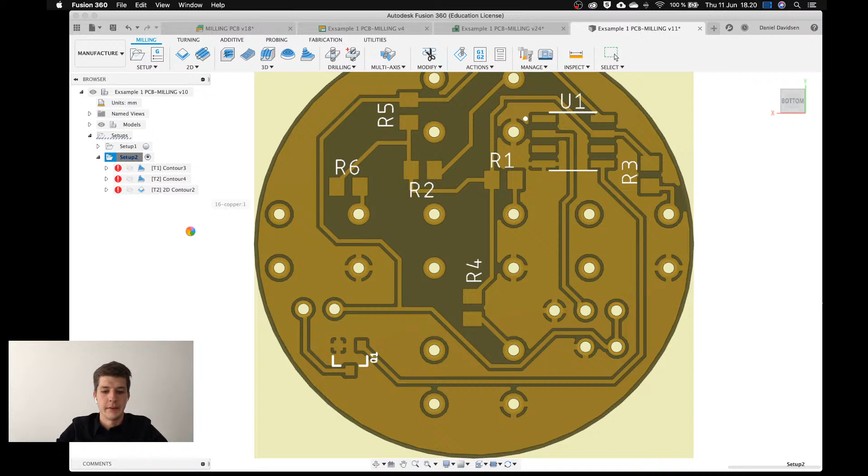I think maybe I was asking a little bit too much for regenerating. Now that it's so dead, for speed's sake I'll force close this and reopen it. It takes a little bit for Fusion to open, but let's just do that. In a minute, it will be ready.

So I will also briefly go over, as Diesel proposed, how to post-process this. It's like any other post-process you would do, but since this is a webinar and someone will see it as one video, we will go over how to post-process this.

Okay. Computer is getting quite hot now. Feels like it's going to take off in a minute.

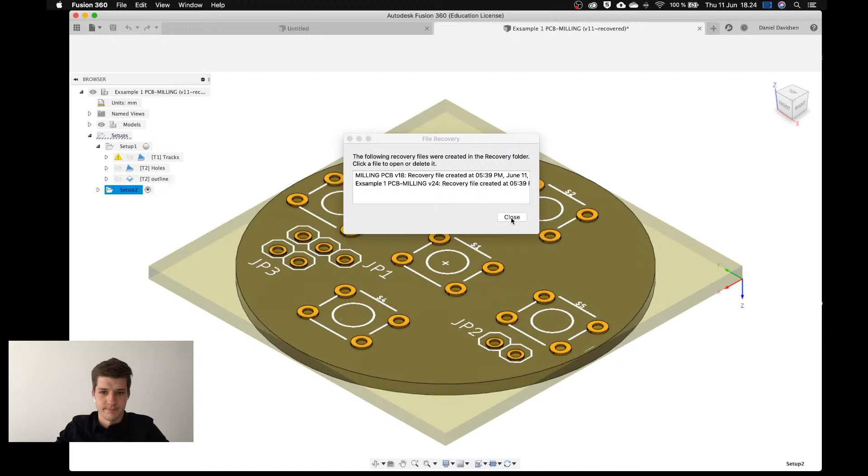I'm just going to post-process the first job up here, and I know it's going to do that just fine. So if I want to post-process a specific job, I can either right-click on it and do post-process. Just a fair warning, some people get this a bit mistaken: if you click on a specific toolpath and right-click post-process, it's only going to post-process that one toolpath. Make sure you click the setup and you should be golden.

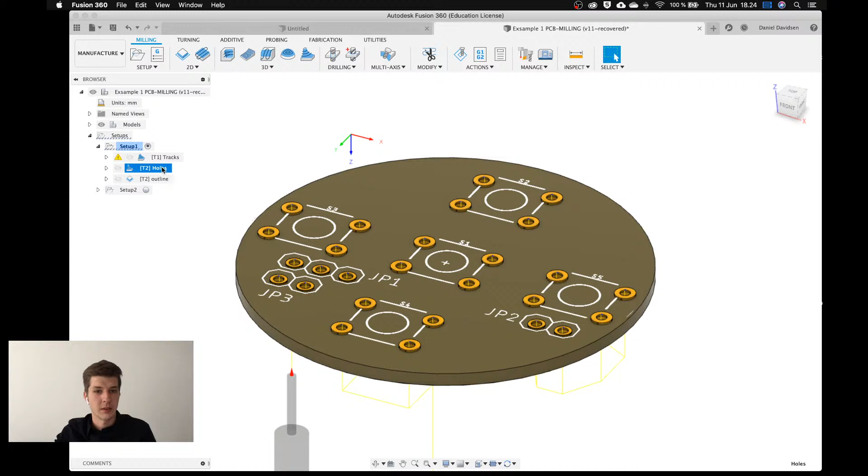But sometimes the mistake can happen that you have just one selected. You can actually see that that's upside down. Z height, Z is wrong, direction... oh, it is? No, maybe. Sorry, I was upside down. It's doing it, oh, it's doing it perfectly.

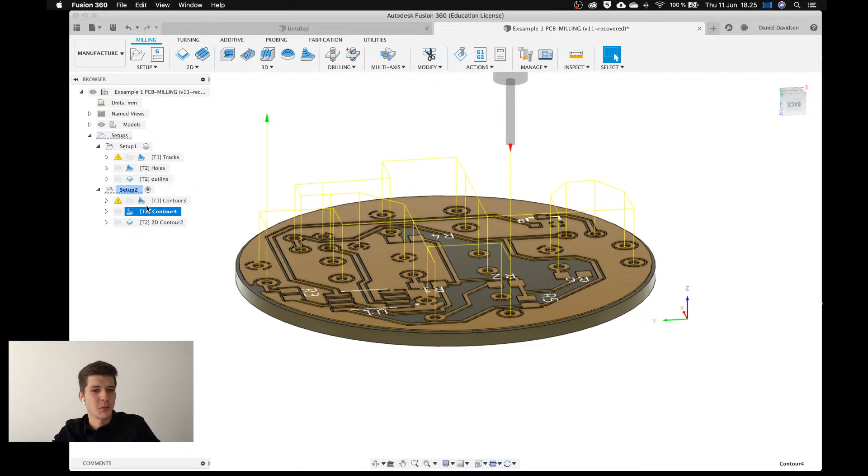So, but of course, it can happen that you have one selected, and you might hit post process here, and that's only going to post process that one tool. Just be aware of that mistake.

So click on setup, click post process, choose your post processor. We're going to use Mach 3 mill, and make sure that minimize tool changes is turned off. It shouldn't make a difference for this kind of tool, but it's a good practice. I also think it's important that you have preload tools turned off as well. I don't think you have to do stop on tool change here. No, perfect.

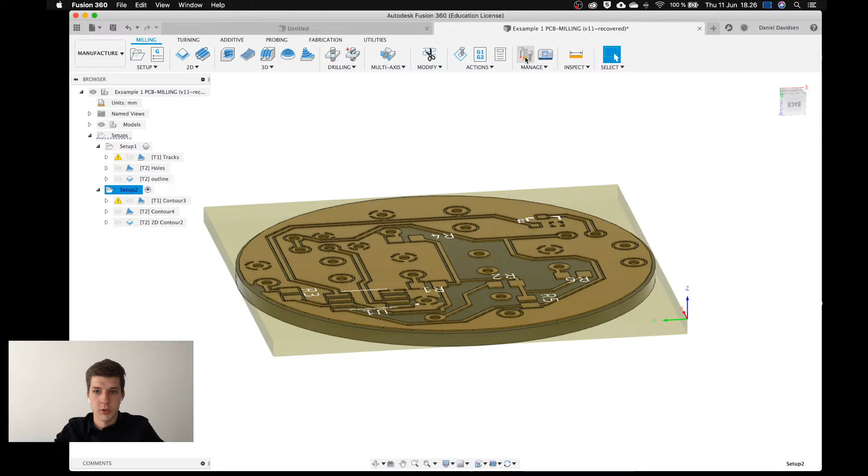Mach 3 will do that if it should do that — we hope it's like that. Then just click OK, and save it somewhere to your desktop. That's the thing. And the last thing was going to be tool order.

So if we are going to make sure that the tool order is correct — oh, not simulate, that's not the thing — tool library.

So I can delete these two tools, I don't need those, and just have these two, numbered 1 and 2. The way you make sure to renumber them is that you highlight both by holding Shift, and then click renumber tools, starting from 1, incrementing by 1.

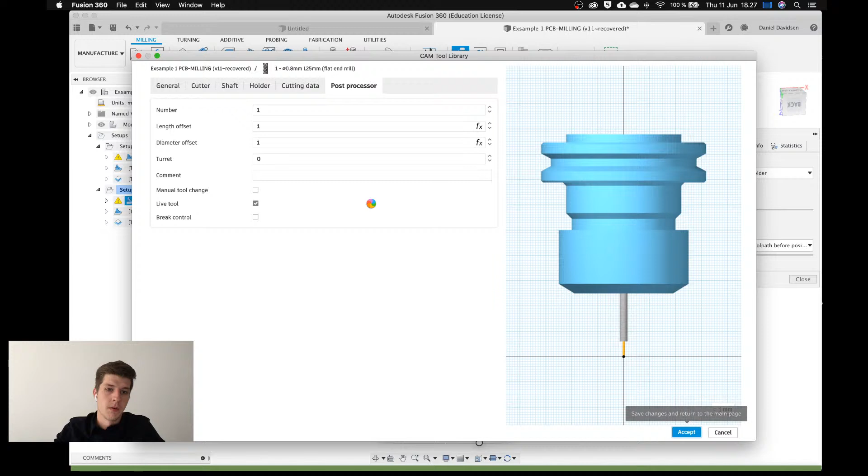It just tells me it's not going to change anything here. But when we start with something, if I edit this tool under my post processor, it is going to listen to what tool this is. So if I set it to 1 and accept... I should actually turn on manual tool change here. I don't really know if it makes a difference, but wow, it is really painful how slow this is.

Yeah, just to show you — now I have two tools, and they're both a number 1 tool, and that shouldn't happen.